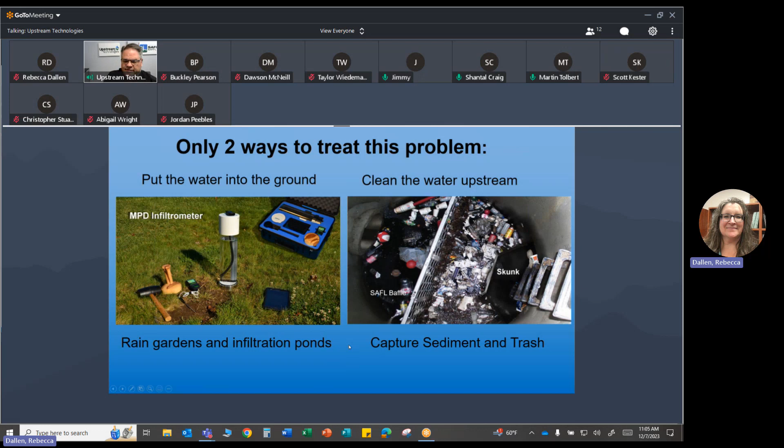So I'll jump in. Please feel free to bring up questions as they come. And if there's anything I'm missing or don't know, I can find that out for you and get back to you. But I'll start with infiltration. Currently, there's lots of ways to do this, but most of them are pretty cumbersome and time consuming. Is this something that you do internally? Is it anything that you do at all? Is it something that you hire out to a geotech? Are there different groups that maybe do this or don't do this in the presentation today?

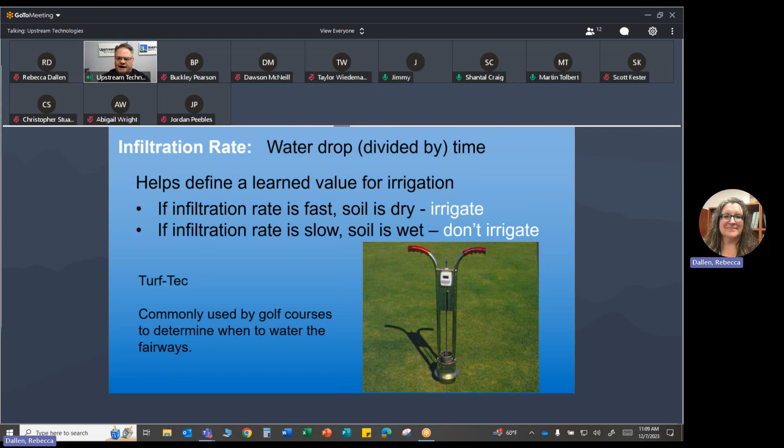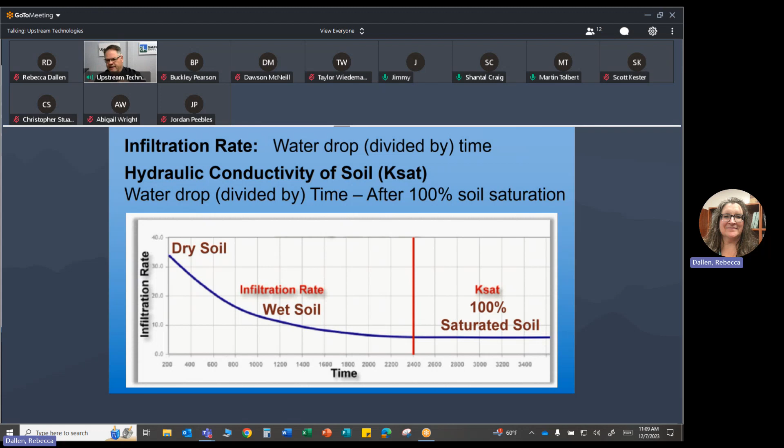There are products out there, like I mentioned, that just measure the infiltration rate. This is a product called the Turf-Tec. They use this in golf courses and stuff a lot, just to see if the ground is infiltrating, if they need to irrigate, if it's wet, if it's dry. But again, going back, that's just somewhere along that falling curve. Eventually it gets where that ground is fully saturated. That's where we want to be.

And so up until now, really cumbersome ways that this was done was drill a borehole or a perc test, fill that hole over and over again until it's fully saturated, and then measure the drop. And how long does it take? And it's very manual, very time consuming.

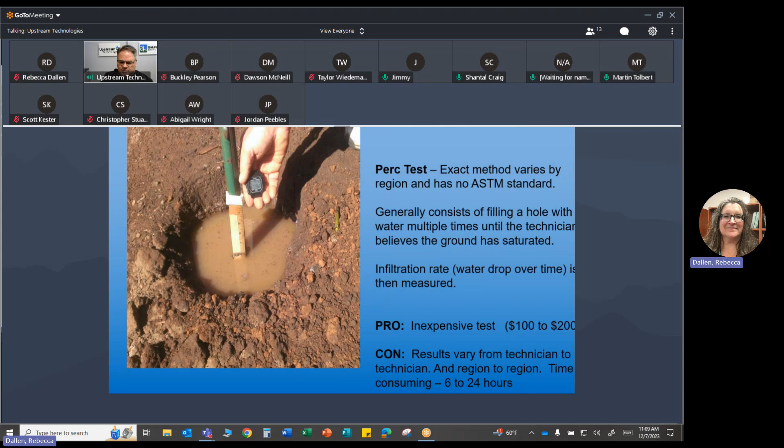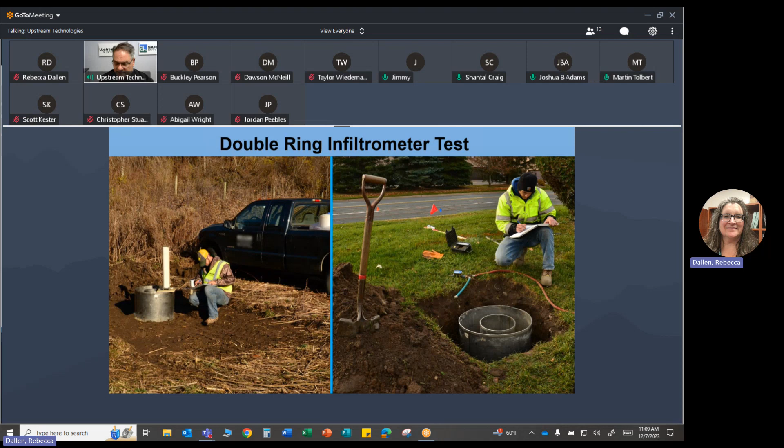Probably the most common and the one that we see the most is the double ring. And as you can see, it's very cumbersome as well. What they do is they bring a tank of water or a big truck, and it takes hundreds of gallons of water, and they saturate that outer ring, and then they keep that center ring at a constant head. So they're constantly pumping water into that. Again, it's very time consuming, usually 4 to 6 to 8 hours to do these tests, and pretty costly if you have to hire this out.

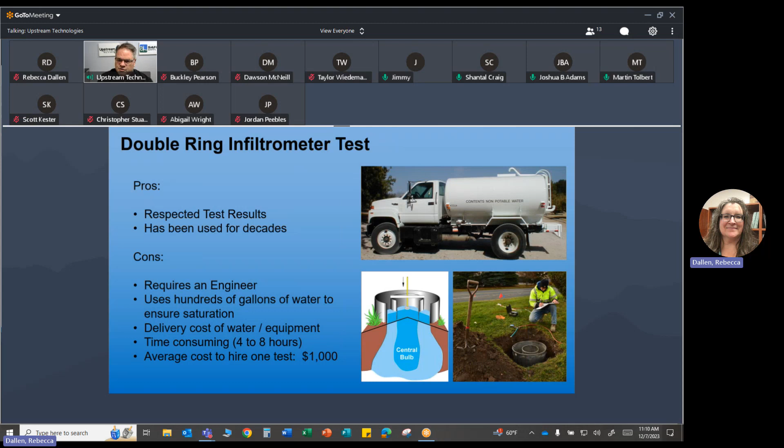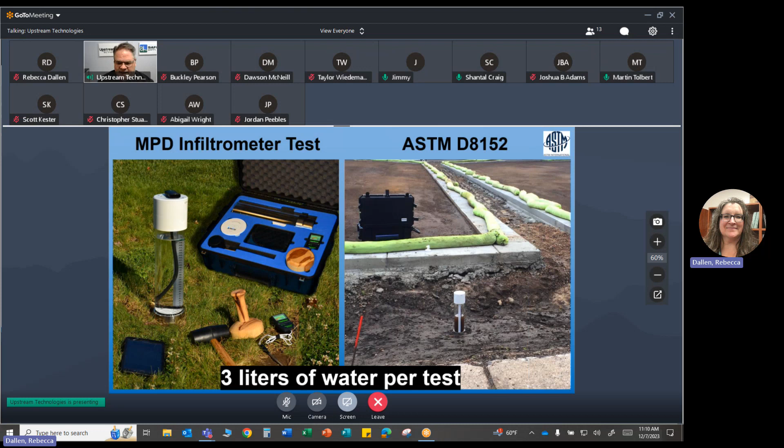So one is the MPD infiltrometer. It's a fully contained kit. Each test just takes 3 liters of water, so less than a gallon of water per test. And so it was established, as I mentioned, at the University of Minnesota after these 2 guys named Philip and Dunne in 1993. They figured out how to calculate KSAT, whether the ground was wet or dry. In 2007, the University of Minnesota modified that test to bring it to the ground surface. And then we started going through research and development, going through the ASTM standard committees and subcommittees.

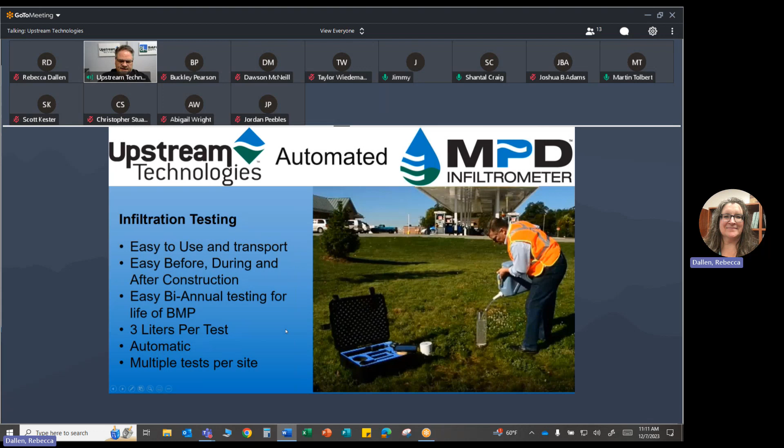And eventually in 2018, this MPD infiltrometer was established as an ASTM standard for calculating KSAT, and then things started taking off for the MPD infiltrometer. So that is a little bit of the history of that. But like I said, now you can go out with a 5-gallon jug. You can perform 5 tests quickly and easily, and it's all automated. And so it's really simplified that process.

I'm going to show a quick video for you. I thought this was already in the presentation, so I apologize. It'll take me just a second to go to our website. Let's see here, MPD. So here is the video. This is about 4 minutes, but it's a really good overview and gives you a really good idea on how the MPD works. So I'll play that and then continue after that.

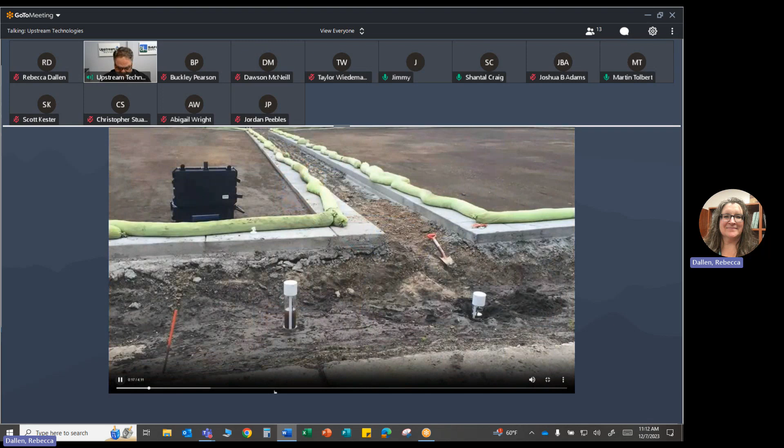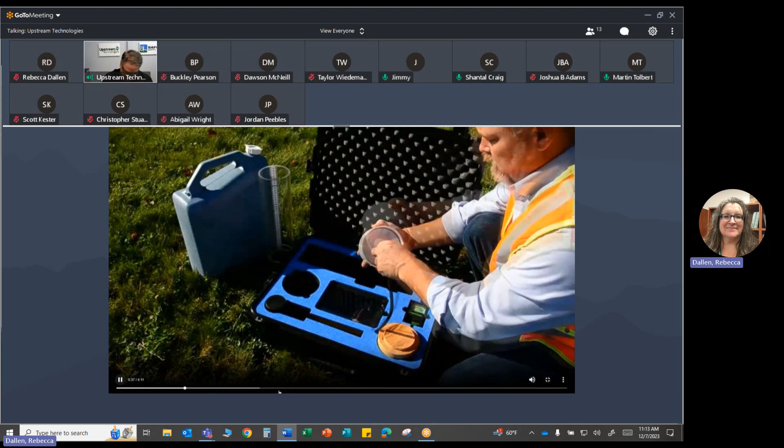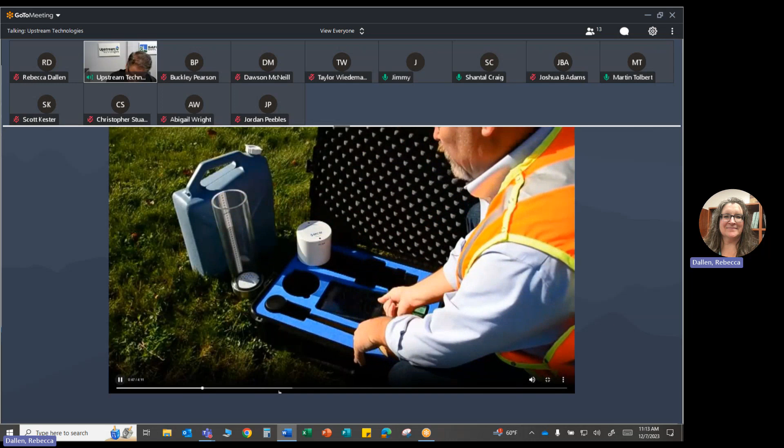Upstream Technologies' automated MPD infiltrometer follows ASTM standard D8152 and will calculate saturated hydraulic conductivity of soil, or KSAT. It is used to design, build, and test rain gardens, infiltration ponds, bioswales, septic systems, and any location where steady-state infiltration testing is required. Lightweight and compact, the MPD can go anywhere and uses less than 1 gallon of water per test. This kit utilizes a graduated cylinder and an automated test head to collect the data. The anti-scour baffle and seal prevents the soil surface from being disrupted when filling the cylinder with water. This automated tablet-controlled system removes any chance for human error.

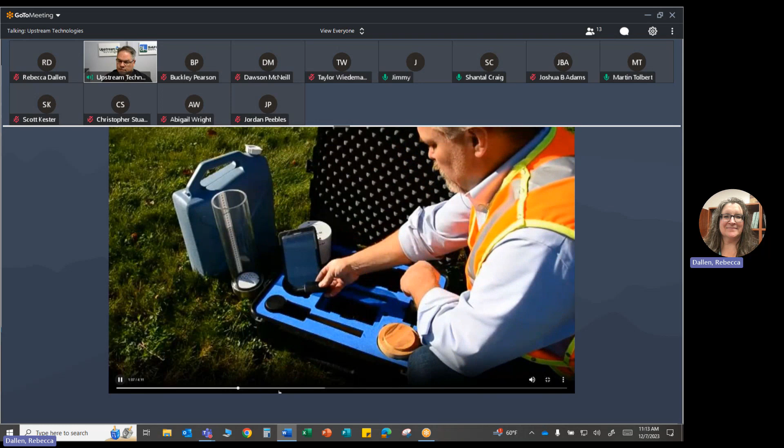Anyone can operate this instrument with little to no training. Simply consult the in-app guide for step-by-step instructions. This system incorporates a Garmin GPS system to automatically report the exact location the test was conducted.

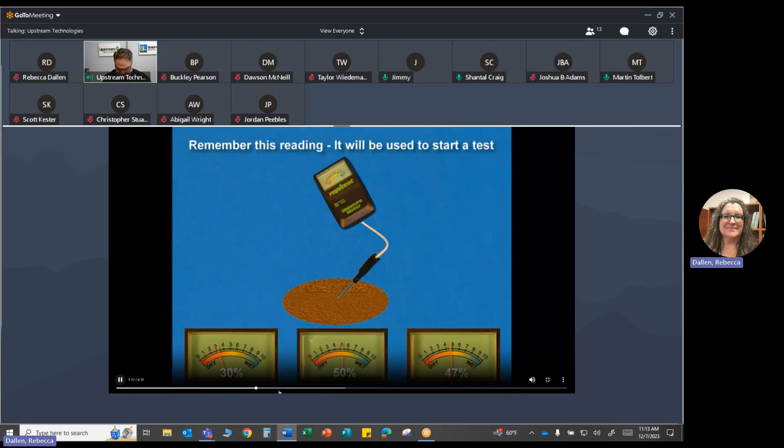When performing a test, the first step is to take an initial moisture reading using the supplied meter. Slowly press the probe into the ground 5 centimeters and wait 15 to 20 seconds for the gauge to settle. This gauge is in 10% increments. The result today is 30% moisture.

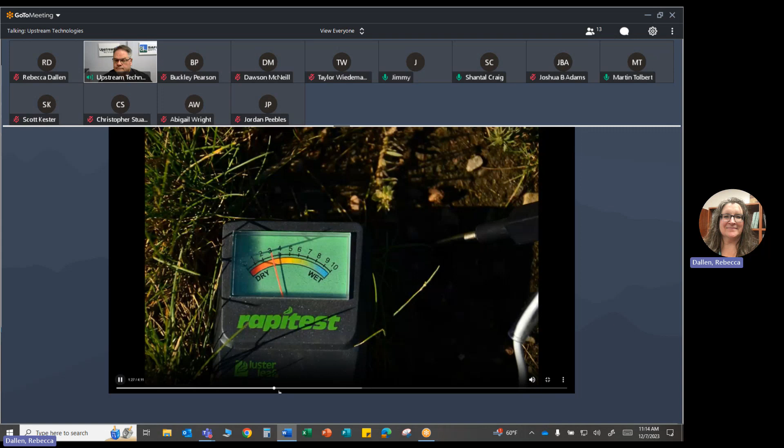Using the wooden set and mallet, tap the cylinder into the ground 5 centimeters. Make sure it is not loose and creates a tight seal with the soil. The anti-scour rubber seal may move during this process. Reach down and reset this seal.

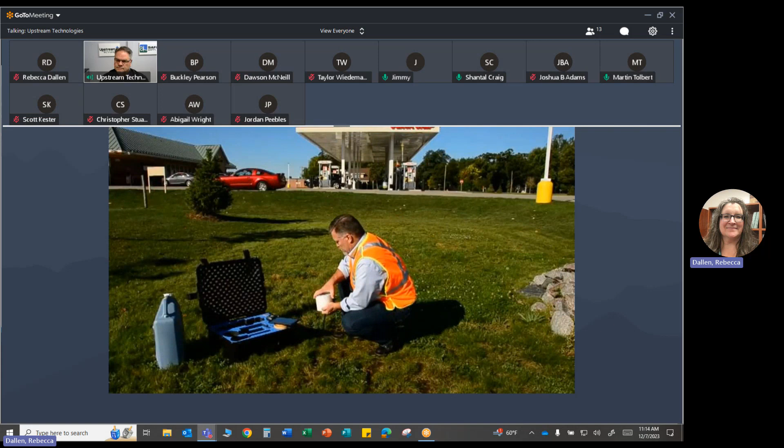Press and hold the button on the top of the MPD head to turn it on, and a green bar will appear in the app. Tap this green bar and a dialog box will appear. Enter the initial moisture reading, in this case 30%, and enter a name to identify this test.

Set the tablet down and fill the cylinder with water. Place the MPD head and hose in and on the cylinder. Pick up the tablet and tap the Submit and Begin Test button. The MPD app will now turn the green bar to orange to indicate the test is running.

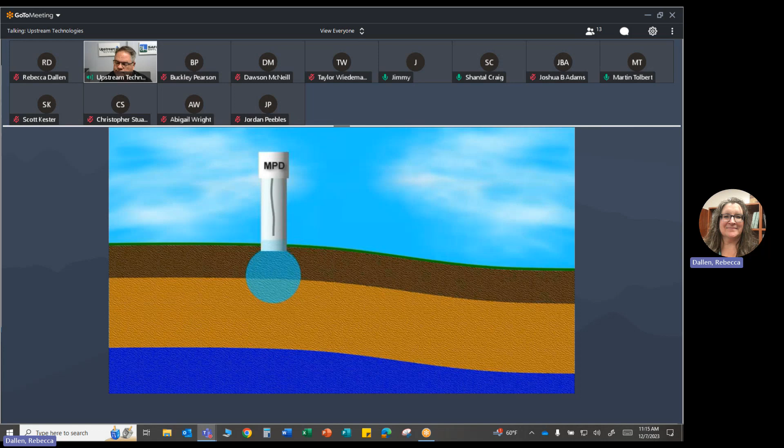The MPD head will measure the water head drop over time and automatically record the data required to calculate hydraulic conductivity. It is best to let the cylinder drain completely before finalizing a test. This will usually take about 45 minutes to an hour, depending on soil conditions.

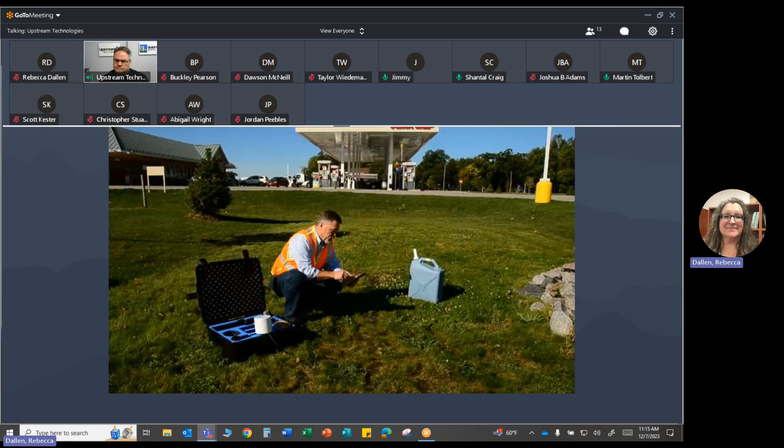When the cylinder has drained, remove the MPD head and cylinder and set them aside. Then take a final moisture reading in the same location as before. In this case, the moisture reading is 80%. To complete the test, tap the orange bar in the app and enter the final moisture value. Then tap the button Finalize Test.

All data will then transfer from the MPD head and will be stored on the tablet. We are now ready to begin another test.

Ground variations change and infiltration will vary around the site. Best practice is performing multiple tests and creating a site average. Ground variations include soil composition and compaction, boulders under the test, tree roots, and even mole and ant tunnels will have an effect.

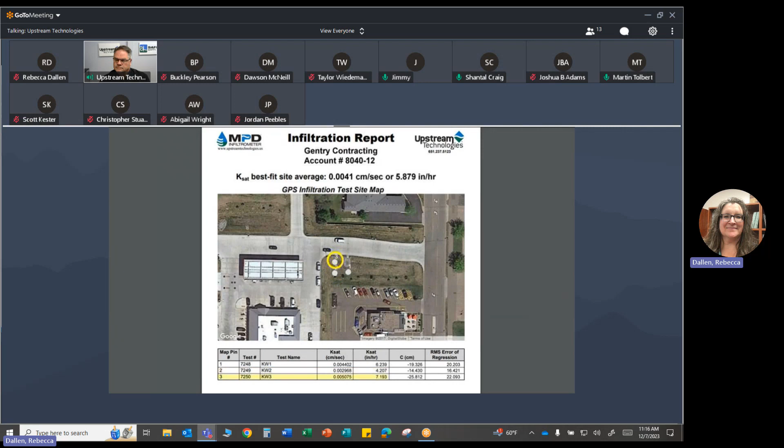When testing is completed, the tests are uploaded to Upstream's cloud server, where the calculations take place. A site report may then be instantly downloaded. This report contains a description of the site, a best fit site average, a satellite photo of the site with a GPS map pin for each test performed, and the hydraulic conductivity for each individual test.

To maximize time in the field, Upstream Technologies offers a triple MPD kit, so 3 tests may be run simultaneously by one person.

So that is a quick overview of the MPD infiltrometer and how it works.

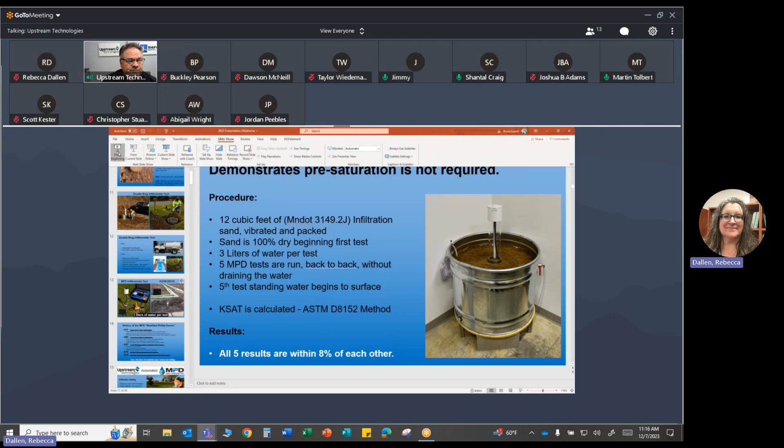So lots of testing. I talked about the ASTM standard and the committees and subcommittees. This was an internal tank that was used to look at this infiltration. Started with a completely dry tank, kept doing tests until there was standing water, so fully saturated, to show that you can calculate KSAT whether the ground is wet or dry.

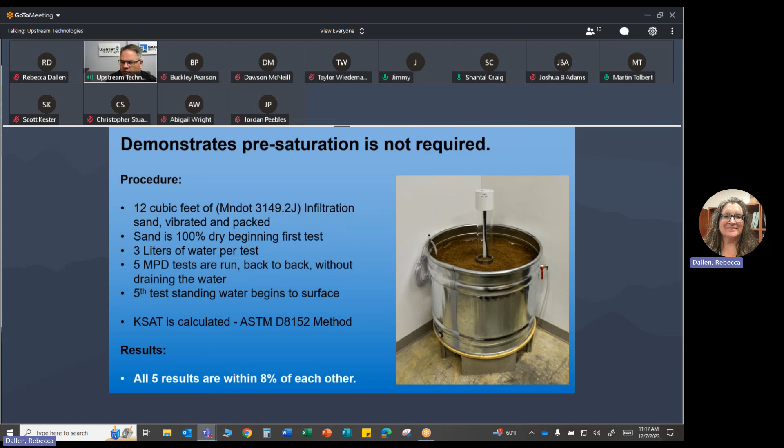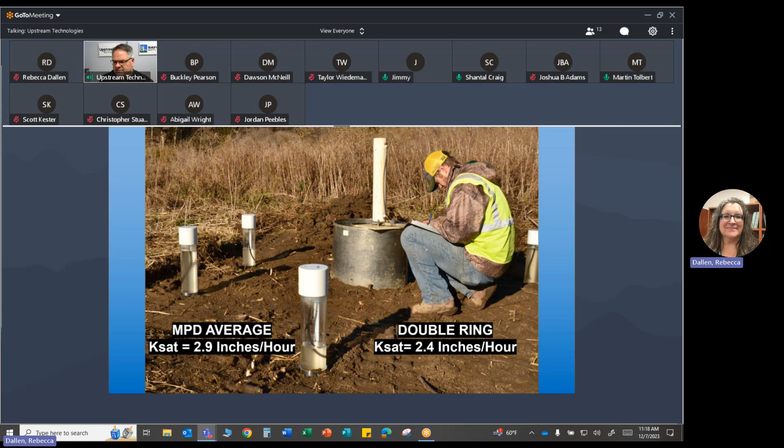So definitely lots of time saving, lots of water saving, as well as a lot less costly.

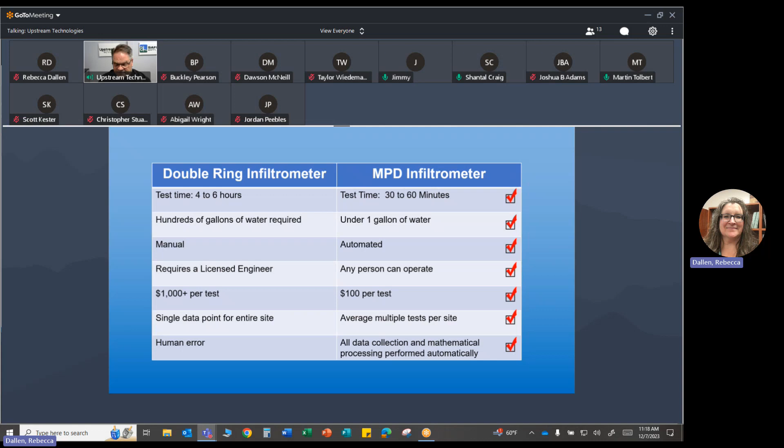Again, the ASTM standard was established in 2018. And so now you can do these tests quickly and easily and for a lot less outlay of cash, so a lot cheaper. As it talked about in the video, you can do multiple tests at the same time.

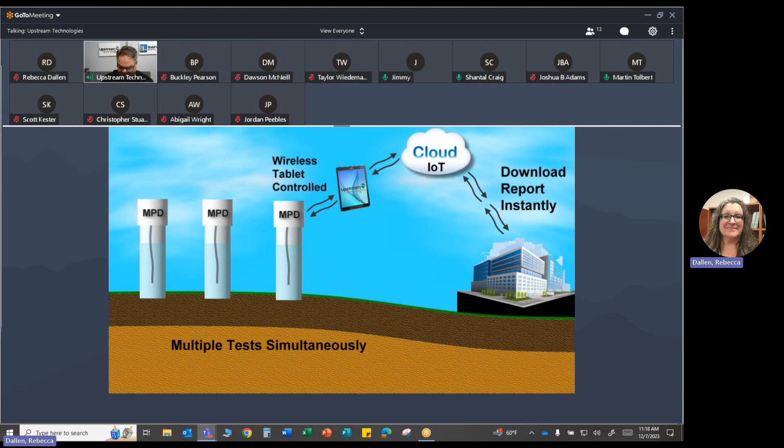Once those tests are complete, it'll go to the tablet that's included, and you can then it uploads to our server once it's connected to the internet, and then you can immediately download that report. So it talked about this a little bit in the video, but it's pretty cool.

You can download this instantly. It gives you a satellite photo, gives you the GPS pinpoints of all the tests that you took, as well as the Ksat for each of those test points, and then an average for the whole site.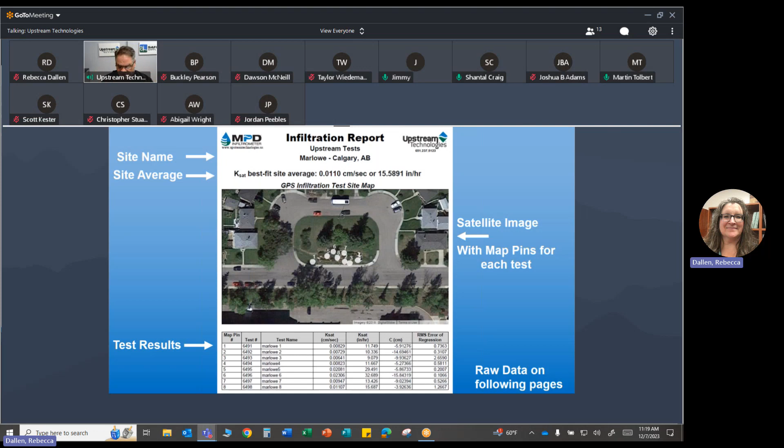Being utilized quite a bit across the country, up into Canada. We're even seeing activity in the Scandinavian countries, Sweden and Norway.

Here in North America, we crossed over 7,000 tests, so it's continually growing. Looking at Oklahoma, we're kind of surrounding you guys at this point, but no tests are being done there. That kind of brought up the question, originally when I was asking if you guys do this kind of testing, I wanted to see if that's anything you see a use for. Is it something you just don't see these tests for, or require them for sizing retention ponds and things like that? Does anyone have a thought on that at all?

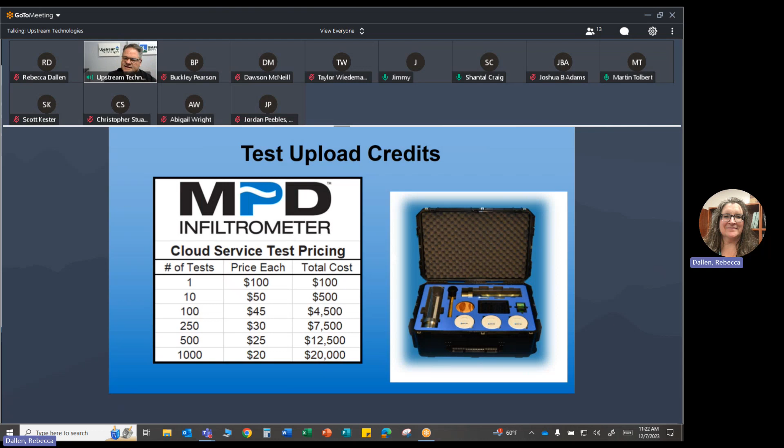So as you can see, rather than spending $800 to $1,000 for a single test point, you can do a whole test for quite a bit less. All the pieces and parts are under full warranty, so if anything happens to it, if something stops working, we'll fix it or replace it at no cost.

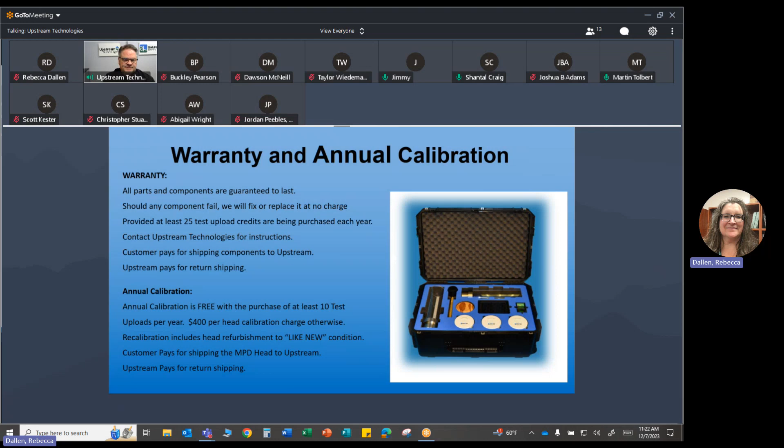The other thing we're starting to see is because it's digital, cities and municipalities are using this as a way to really track those retention ponds and figure out what the maintenance triggers are, what the levels of infiltration are, because you can go out and do these tests so quickly and easily. And because it's digital, they're looking at ways to tie it into their asset management software, their GIS software, things like that. So that's a quick overview of the MPD infiltrometer.

If anyone would like more information, we have a group that focuses just on the MPD, so I can put you in touch with them and they can give you more detailed information if there are questions. But is there anything right now, any questions, before I move on to the SAFL baffle? No?

Yeah, those are some things that we've looked into. As of right now, they're just being sold as a kit, but we do have groups that have those and can source those out. As far as Oklahoma, I don't believe we have any there yet, so that's something we can keep talking about.

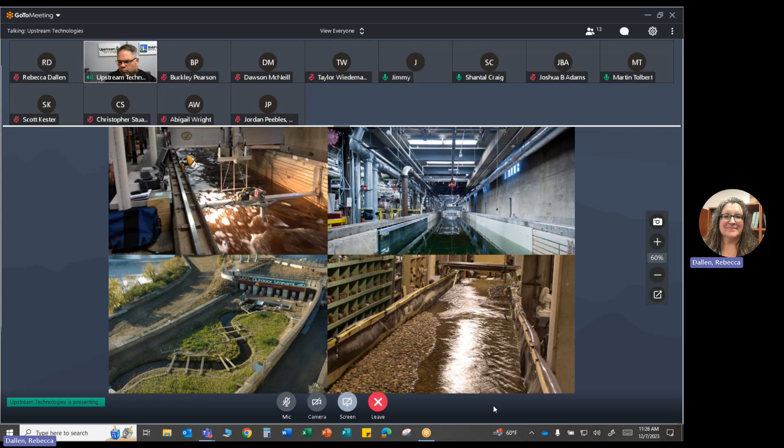People come from all over the country to do testing here. Back in 2007, our Department of Transportation went to St. Anthony Falls and said, we're having a problem. We put in all these sump structures across the state, and they're capturing only about 30-35% of the sediment, because what's happening is it captures the sediment, and then if a big storm comes through, it washes all that sediment out and sends it downstream. So they asked St. Anthony Falls, can you figure out a way to stop that from happening? And so they embarked on a 4-year research and development effort to try to solve this problem.

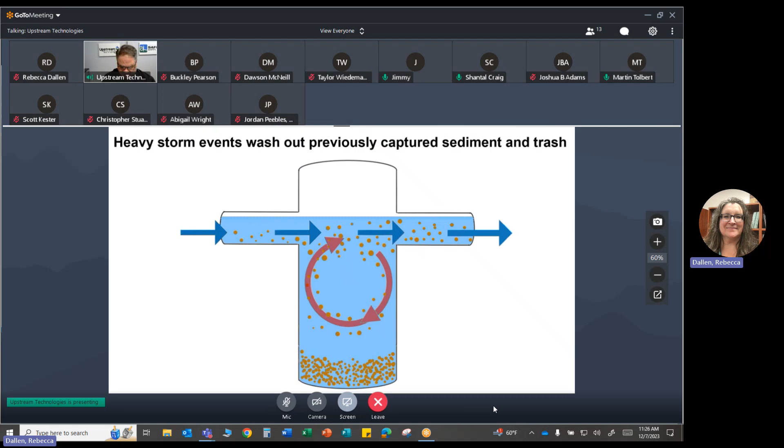After 4 years, they created the SAFL baffle. It's a very simple solution, but it took them a while to figure out all the details. It simply goes in a standard sump structure and eliminates all that washout. So now you can take a standard sump, put a SAFL baffle in there, and get up to over 80% TSS removal simply by putting a SAFL baffle in there.

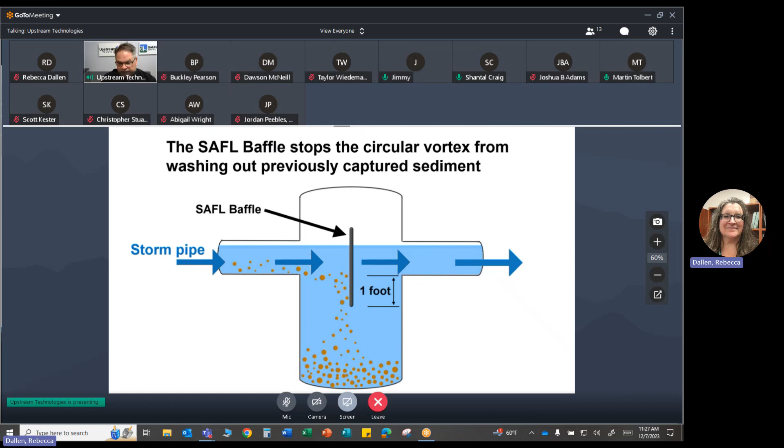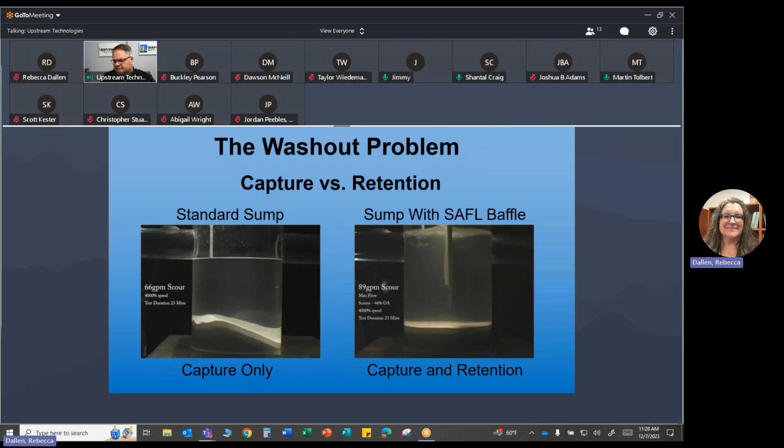So now you can get the same kind of capture rates as a hydrodynamic separator, but at about 1/5 of the cost. So quite a bit less expensive.

They started out very heavy in Minnesota. Now we're in about 27 states. We have probably 150 to 200 of these that go in the state of Minnesota every single year. But as I mentioned, it's expanding out. We're starting to see some activity in Texas and, again, kind of surrounding Oklahoma. But it's something that if you guys run into situations where you need to get sediment out of the storm drains, this is a very cost-effective way to do that. And we're gaining popularity every day. So we've been excited to see the expansion. Again, we started out primarily in Minnesota, and now we're out into 27 different states.

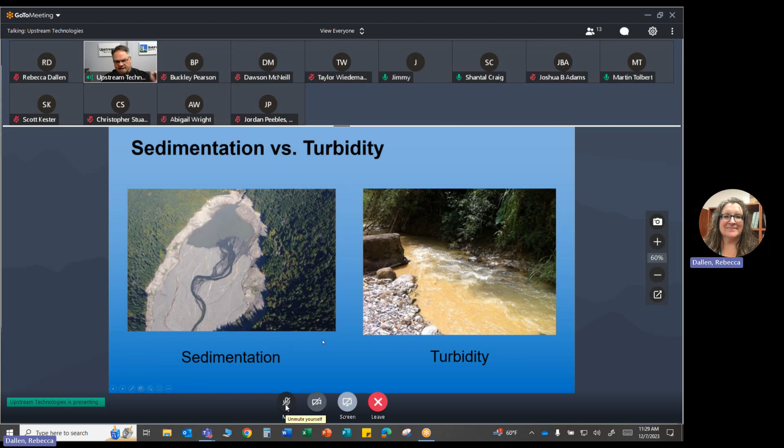It's focused on the sediment side, so it definitely falls in the hydrodynamic separator category. Turbidity is more of the real fine stuff, and we run into that a lot in Georgia because they have real fine clays. So we focus on the sediment, which is 70 microns and above. Anything smaller than that would require some sort of filter or membrane type system, because the hydrodynamic separators only handle 70 microns and above as well. And when you look at those, they're typically $20,000 to $30,000 to $40,000. The average SAFL baffle is about $4,500. So quite a bit less expensive.

The other thing that we're seeing, and again, this is just ideas to keep in mind, if you do need to capture the real fine particle sizes and deal with turbidity, we've been seeing a lot of pre-treatment with the SAFL baffle. So the SAFL baffle can be used as primary treatment and achieve those 80+% TSS removal numbers. But if you have some sort of filter system, a pond, or an underground chamber, the SAFL baffle can be utilized as a pre-treatment device, part of a treatment train. That's very common. We're seeing that a lot.

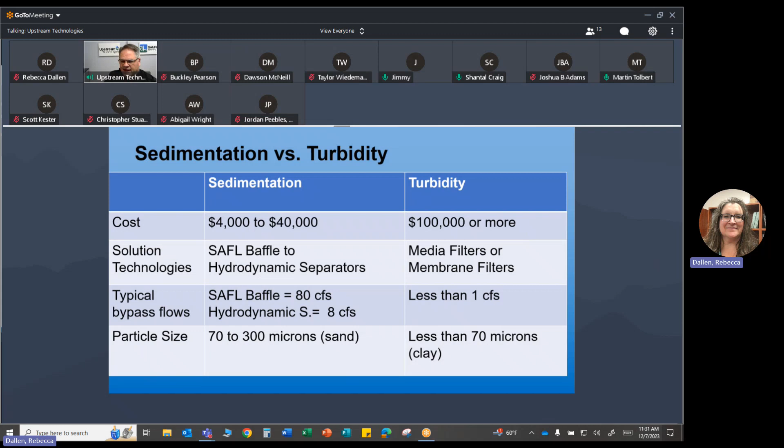Again, about 90 to 95% of the sediment is 70 microns and above, so that's where our focus is, and we really help with the TSS removal goals. That 80% seems to be very common, and we're achieving those all the time, 80+% TSS removal. It's also helping with reduction of dredging costs because now we're vacuuming that upstream, and also phosphorus removal. St. Anthony Falls is doing a lot of work with phosphorus removal testing. It's years in the making, and they're looking at phosphorus - is it all in the water, or is it clinging to the sediment? There was a test done in Florida where they showed about 50% of the phosphorus is clinging to the sediment. So if we can get the sediment out of there, we're really helping with that as well.

TSS, again, has two parts: there's the capture piece, but also the retention. By adding a SAFL baffle to a sump structure, you not only get the capture, but you retain it and achieve those high TSS numbers.

It's built out of stainless steel, so built for longevity, and there's no maintenance to it—no moving parts or maintenance. It's a very simple solution. Once it's installed, the only maintenance is vacuuming out those sump structures.

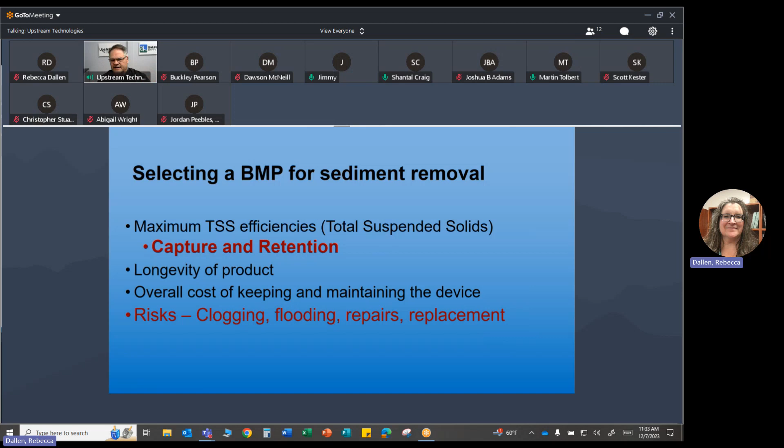The other thing that was a big concern for the DOT, now that we're putting something into these sump structures, is they wanted to make sure it wasn't going to clog or back up systems. So there was lots of testing and research into making sure it's not going to clog, and if for some reason something did clog it, it's not going to back up the systems. So lots of testing with that.

If you haven't seen the SAFL baffle, this is what it looks like. Again, it's built so that it could be retrofit without having to tear up the streets. It can be new construction, but it comes in panels and parts so that everything fits through the manhole and can be retrofit as well. So it's being utilized quite a bit in both of those scenarios.

A lot of times it's new construction, other times it's being retrofit into existing structures, and the cities or municipalities don't need to tear up the streets—they can just put these in.

The testing they did, that 4-year process, included lots of testing, case studies, and real-life performance results. But the other thing that was done during those 4 years was they worked with Barr Engineering and created a software called SHSAM—sizing hydrodynamic separators and manholes.

One of the things we're offering is if you have any projects with sediment capture needs, we'll do this free analysis for you and show you what the TSS removal numbers would be, the costs, and the sizing for your project specifically at that location. We can also help determine if you need multiple structures and what's needed to achieve that 80+% TSS removal number. If that's something you guys need, we can do that analysis for you.

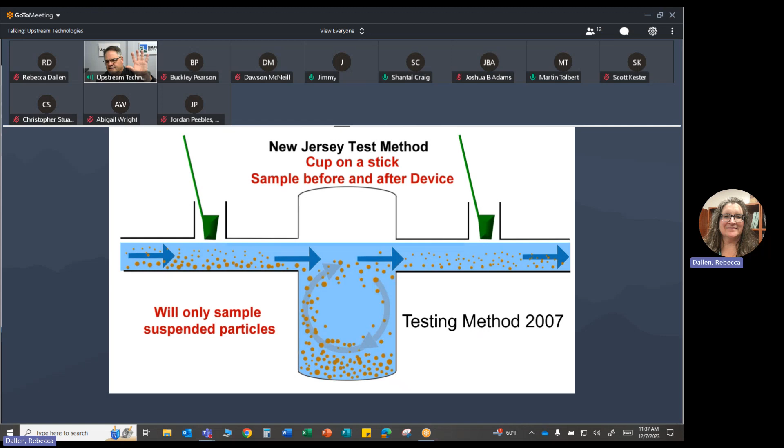So this is what's been put into that software, so now you can compare these BMPs head to head. The cool thing is the University of Minnesota created this new test method, and it became an ASTM standard for testing. Now the New Jersey cup method has kind of been pushed aside, and the New Jersey test method now is this mass balance method.

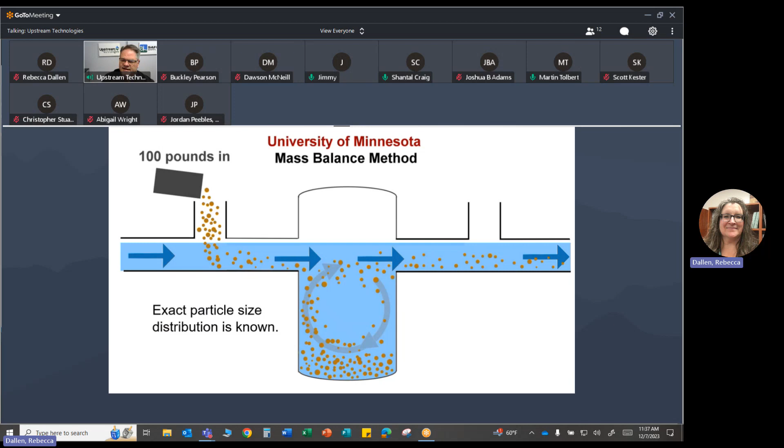The SAFL baffle has been tested by New Jersey, or the NJCAT and NJDEP, and it's been fully tested, verified, and certified by NJCAT. So that's something that has been happening.

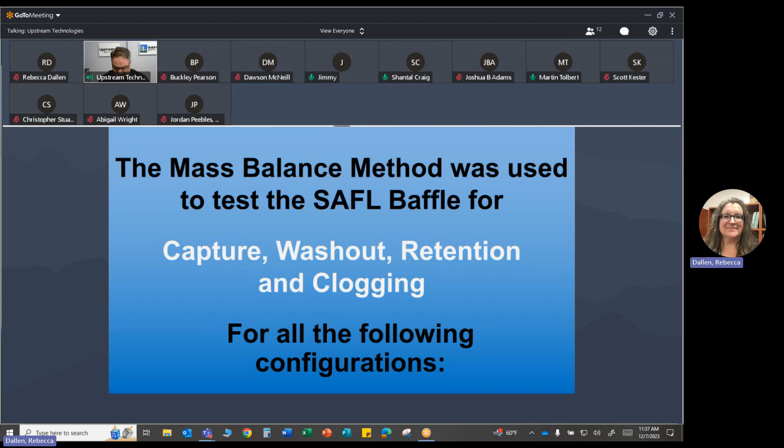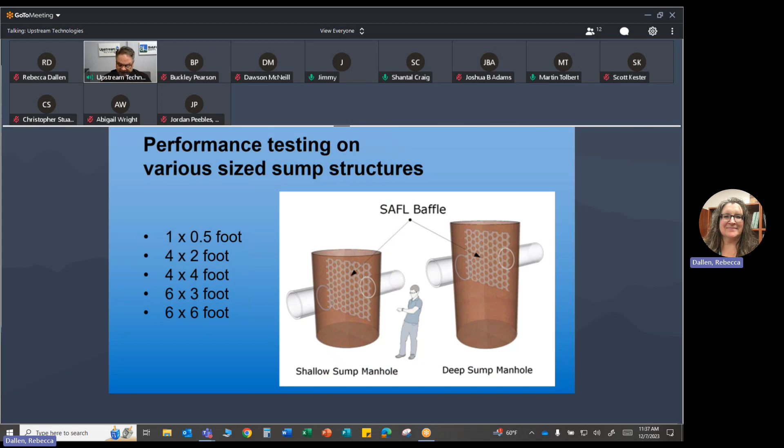They did lots of testing with the SAFL baffle to solve this problem, looking at different things like low flow rates, high flow rates, and different sump sizes. One thing they found with the sumps is that the deeper the sump, the more capture, which seems to make sense up to a certain point.

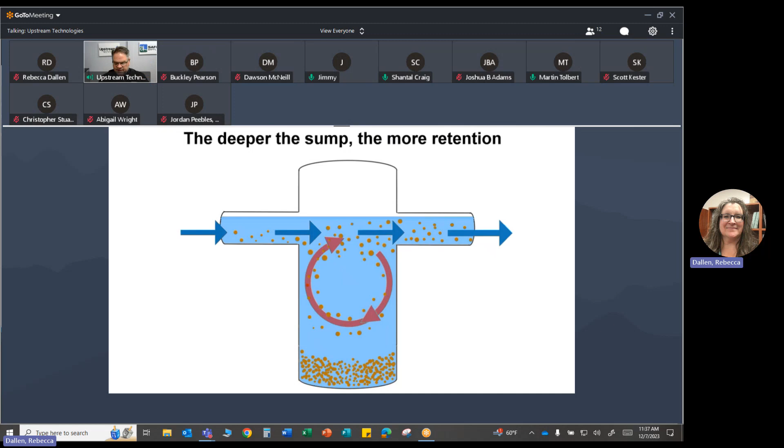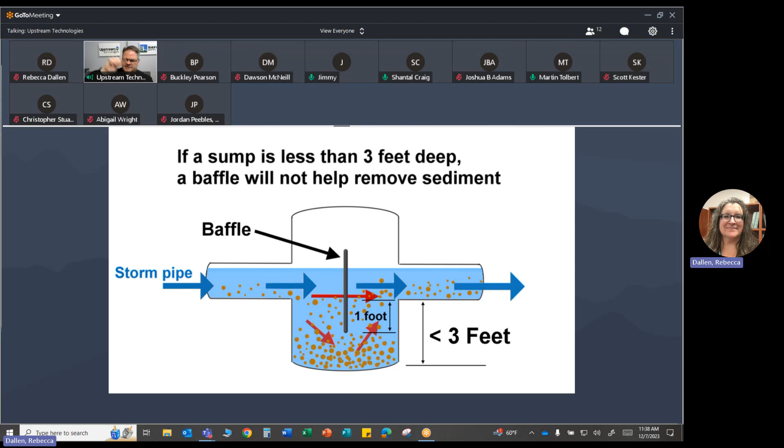But going the other way, they found that if the sump is under 3 feet, even with a SAFL baffle in there, they're getting some washout. So we have a minimum of a 3-foot sump for both the SAFL baffle and the SNOUT. They both sit a foot below the outlet pipe, which allows 2 feet at a minimum of capture space and eliminates all that washout.

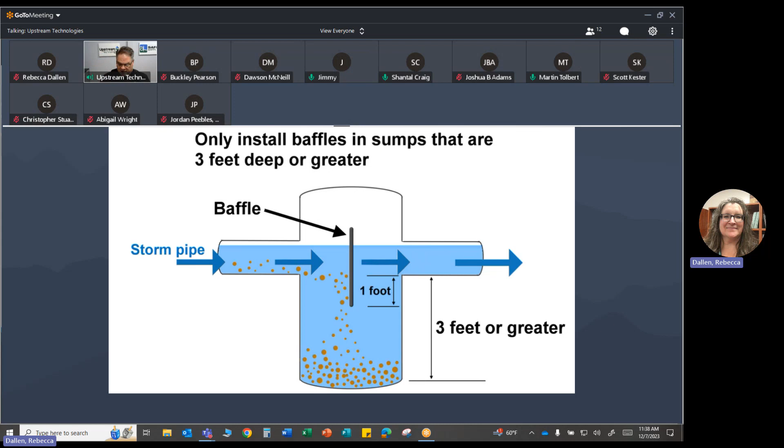They also looked at the placement of the baffle, and if they got too close to the inlet pipe, they were getting washout. So we focus more towards the center of the structure and make sure there's enough room for a vac truck to get down the middle if the manhole is in the middle. We've also seen 2 manholes put in on the side if it's new construction, so the vac truck can go on either side.

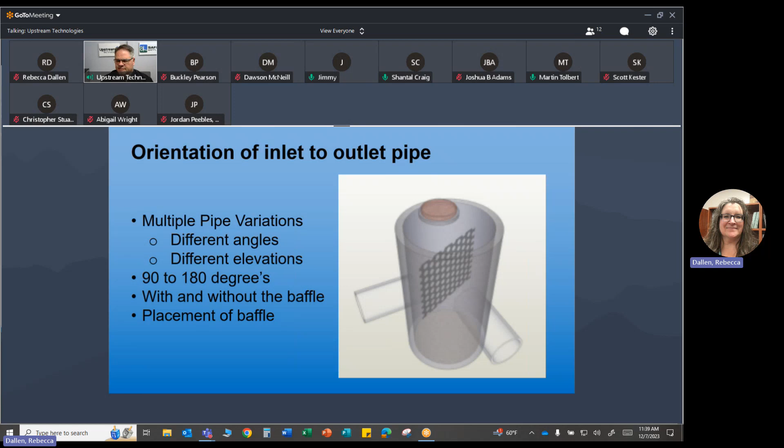They also looked at different angles because, as you know, the pipes aren't all 180 degrees apart from each other. So depending on how the angles come in, that depends on how the SAFL baffle will fit. We can do CAD drawings for that as well and show you how the SAFL baffle would fit and how it needs to be installed for your specific project.

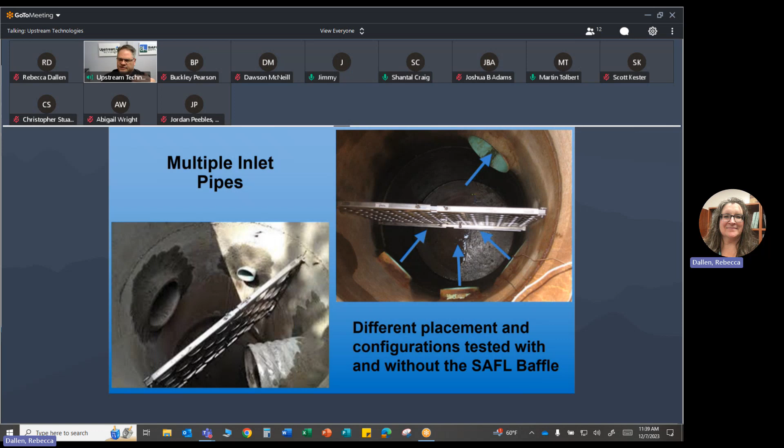It also works with multiple inlet pipes. So if there's multiple inlet pipes, we can help with that and do the CAD drawings for that as well.

But there is one type of sump it doesn't work very well with, so something to be aware of. If all the water is coming from the top, like a catch basin at the end of a parking lot or something like that, we need at least 75% of the flow to be horizontal. So we can have some water coming from the top, but if all the water is coming from the top, we'd want to be downstream from that so we can have that horizontal flow.

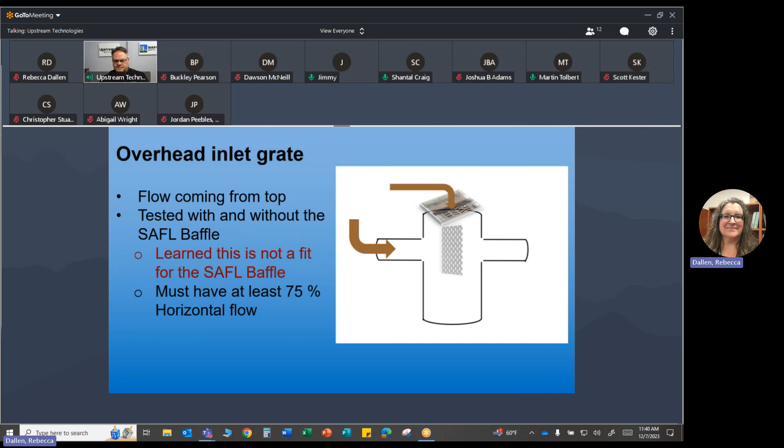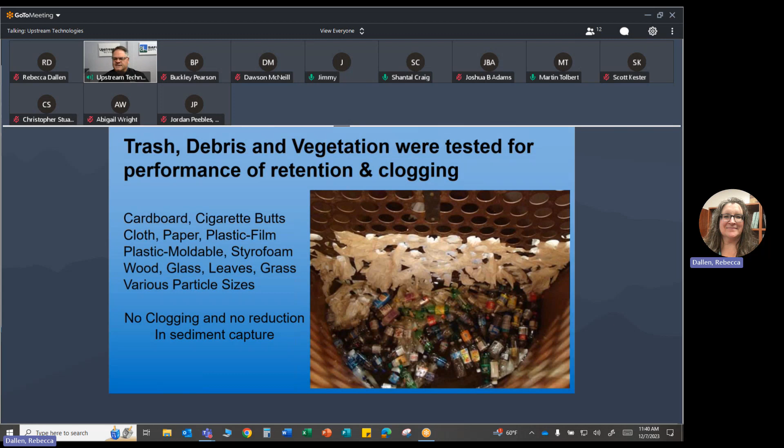I talked about the garbage. This is some testing they did—they actually clogged it and made sure that even if it's clogged, it's not going to back up the system. And we have over 2,200 of these now around the country, and none of them have caused a backup.

This one is in our capital city of St. Paul, Minnesota, and as you can see, a lot of garbage is coming through that. Typically these sump structures are required to be cleaned out about every 6 months or so, that's about the typical time frame. This one is cleaned out a little bit more frequently—the maintenance crew keeps an eye on it because of all the garbage coming through. But typically it's about every 6 months or so for a clean out.

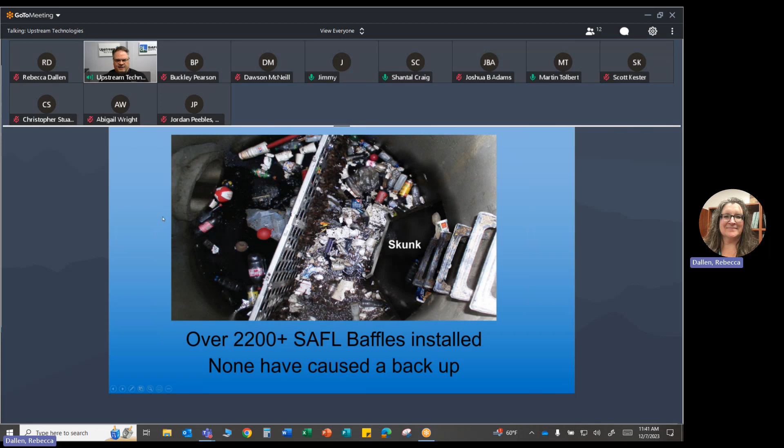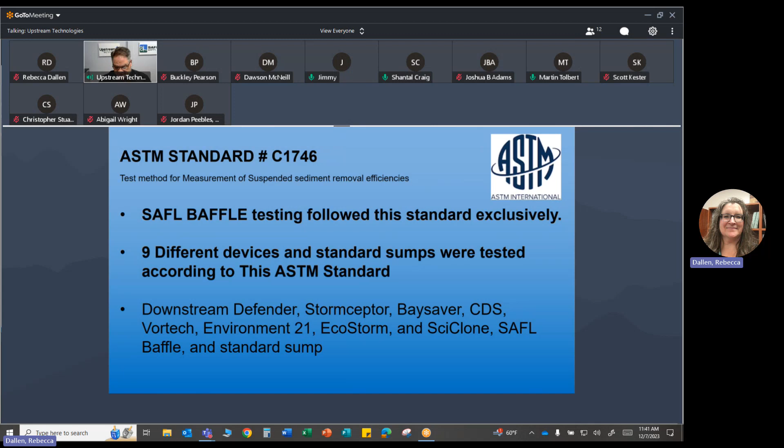The SHSAM software, real quick—these are the 9 products that were tested, so you can compare these products head to head. This is the third-party software we'll use to do a free analysis for you if you have any projects. We'll look at the acreage of the project, the impervious area, the slopes, pipe diameters, and all that, and then give you the exact TSS removal numbers for that project using the SAFL Baffle.

This is one we did in Madison, Wisconsin. They had to hit 80% TSS removal for this permit. So with the software, they looked at what if we just put a 4-foot sump in there—it came in about 32%. They put a SAFL Baffle with the 4-foot sump, and it bumped all the way up to 71%, but they needed to be at 80%.

So they said, well, we could put a second structure in there, or what if we just make this structure a little bit bigger, make it a 6-foot sump. They were able to hit 80% with a 6-foot sump and a SAFL Baffle. They also tested the Stormceptor, the Downstream Defender, and the CDS unit, and those also hit 80%. In fact, they were a little higher than us, but they were also 3, 4, or 5 times the cost. So as you can see, even with one structure, there's lots of money to be saved with a SAFL Baffle and sump structure. But if there are multiple structures, this can really add up and save the municipality, city, or client—if it's a developer or something like that—a ton of money on that project.

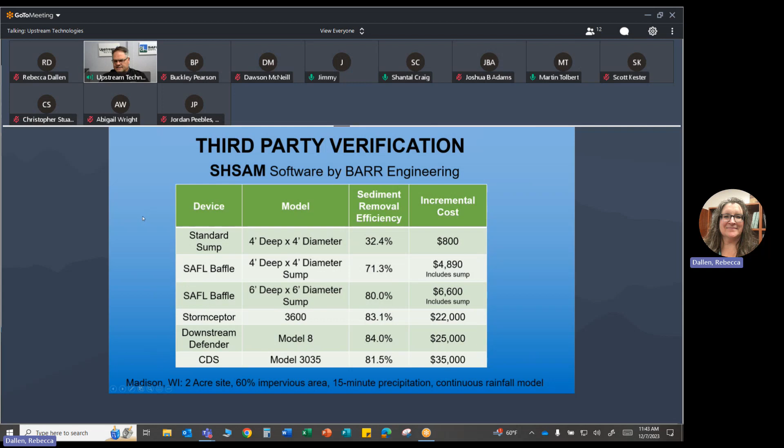Again, made in the USA, 100% stainless steel. And one of the things that we did in 2019 is, we always said it'll be a 20+ year lasting product. So you can put it into the sump structure and just, twice a year, vacuum it out and you'll be good to go.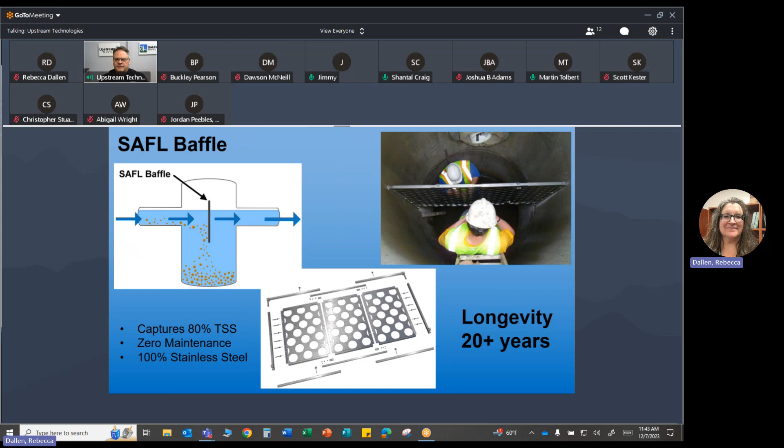But in 2019, we actually put together a 20-year guarantee. And so the SAFL Baffle is guaranteed for 20 years. If anything happens to it, we'll fix it or replace it at no cost. And so every SAFL Baffle comes with a month and a year stamp on it, and it's under full warranty for 20 years from that date.

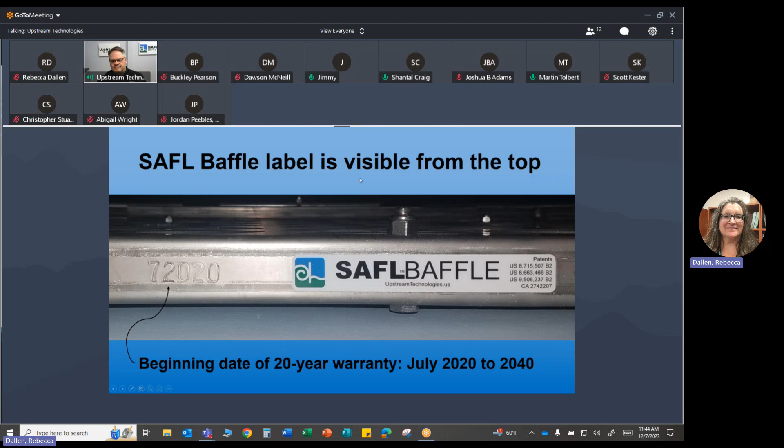The DOT here in Minnesota put out a report in 2017, and they said that the SAFL Baffle is saving the state quite a bit of money. And over the next 10 years, they said it'll save the state over $26 million. Those savings come from all sorts of different things, including the reduced need to dredge. So they're not going to have to dredge as often, but also they can save money on the projects themselves by not having to put in the much more expensive hydrodynamic separators.

And then they're able to also retrofit these into existing sump structures, so they didn't have to do all the street tear up and reconstruction. So lots of money was saved by using the SAFL Baffle. We were pretty excited for them to call that out.

I mentioned pre-treatment before a filter system. Here's an example of a forebay replacement. So a lot of times in these ponds, there's a forebay they put before to capture the sediment and the garbage before it goes into the retention pond.

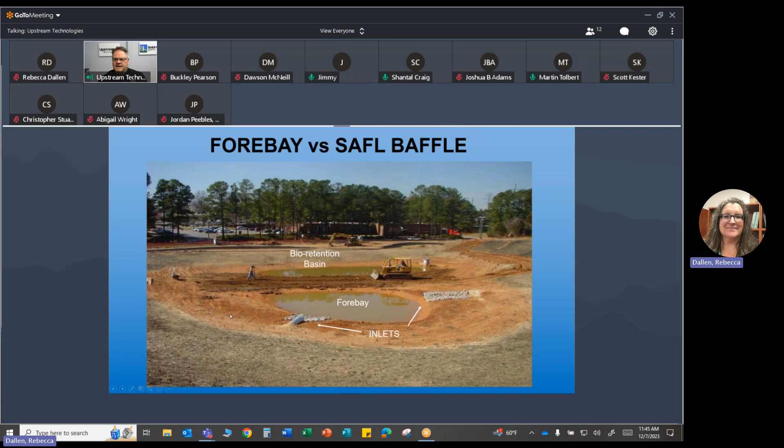But what we're seeing is, especially if there's space restraints, rather than doing a forebay, putting a sump structure in there with a SAFL Baffle if there's sediment issues, and then if there's garbage, put a SNOUT in there as well, and do a pre-treatment before the retention pond without a need to have a forebay where the garbage is floating in there, or they have to dredge out that forebay.

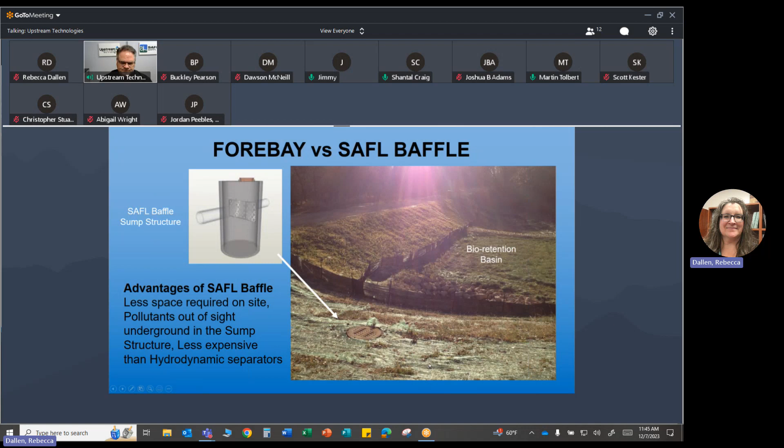We're also seeing it a lot in front of these underground chambers. So this was one that we did in Minneapolis at the 3M parking lot. They put in a big underground chamber. And so what they did was they did 3 sump structures before the underground chamber with Saffle Baffles in those to stop the sediment before it went underground. So we're seeing that quite a bit as well.

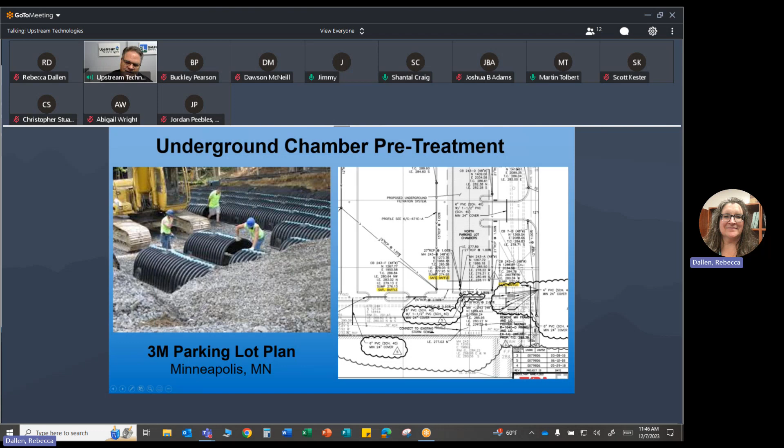Some retrofit things that we've seen, just again, this is more just to be aware of. If you run into certain situations where you're thinking, oh, if we had a retrofit product or something we could do without having to tear up the streets, that would be great.

And so we retrofit a SAFL Baffle across that 10-foot structure. We added additional bracing because the flow rates were so high. But here we are 3+ years later, and it's still working great. It's handling the high flows, but also handling those rocks coming through there.

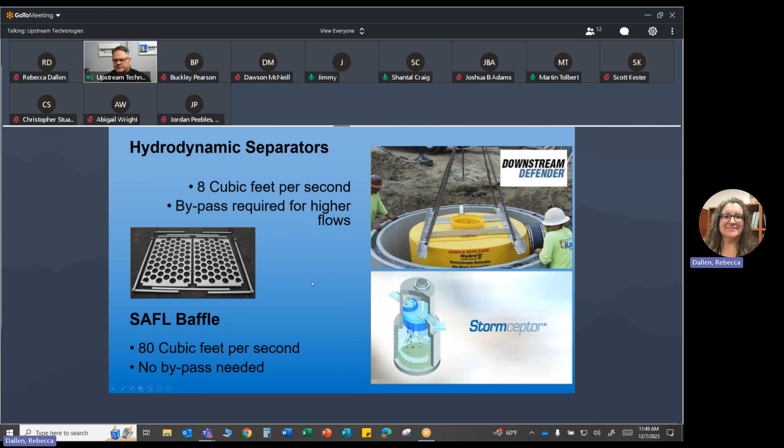And then the following summer, they had a new construction project, and they just did standard sump structures with SAFL Baffles in them and saved a ton of money doing that. So it can handle the really high flow rates, and there's no bypass required.

And so we were seeing a big confusion in the market that all these baffles were the same. And so we'd see projects with this product listed and then a picture of the SAFL Baffle, or vice versa. It'd say SAFL Baffle and then it'd be a picture of this. So just want you to be aware of that. Not all baffles are created equal.

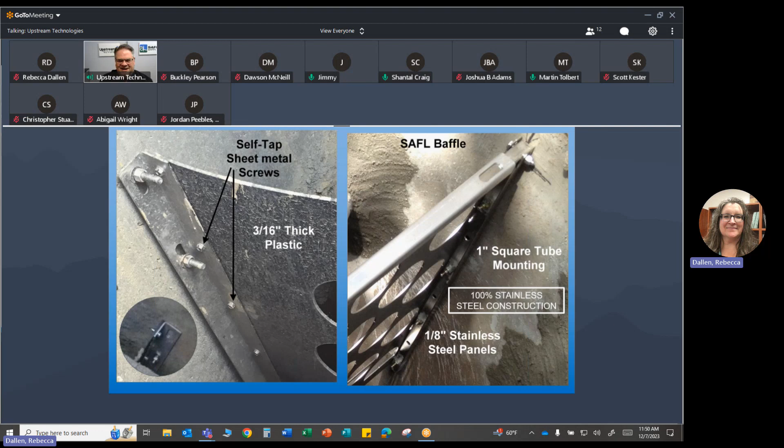This one, actually, the problem started happening. If any pipes were sticking out at all, these were getting installed right up against the pipe. And you can only imagine the backup and the clogging and the issues that this started to cause. So I don't know if you'll see it in Oklahoma, because a lot of cities are calling and saying, hey, these are clogging. We had maintenance crews that had to cut these out, and so now there's nothing in there. Can we put a SAFL Baffle in there?

The worst one was, there's a piece over the inlet pipe and then a piece over the outlet pipe. We had one city where the outlet piece got pushed up against the outlet and flooded the whole street. It was like 2.5 feet of water, flooded basements, cars that were flooded. So big issues with these for clogging, and that's one of the nice things about the SAFL Baffle. The way it's situated in the middle of the structure, it's not causing backups or clogging like that.

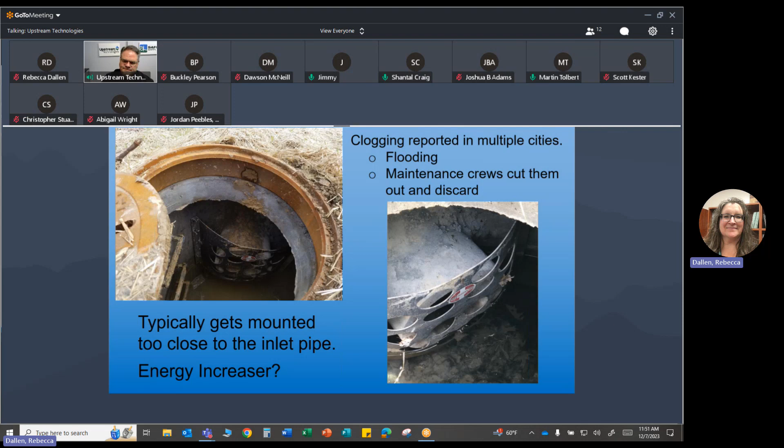The other thing that we've seen is contractors just say, it's just a piece of metal with holes in it, so I'm just going to take a piece of metal and cut holes in it. Something for you to be aware of, because the problem with this was the contractor charged them for a SAFL Baffle, and then they just built one. And this was only 25% open space. And it was actually causing more turbulence than if it wasn't even in there.

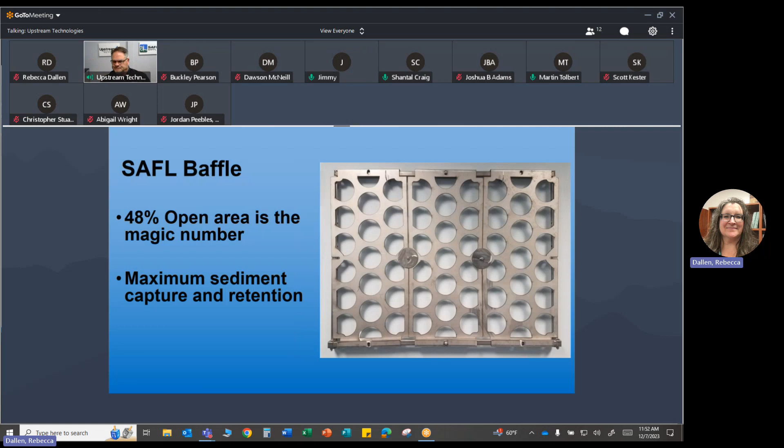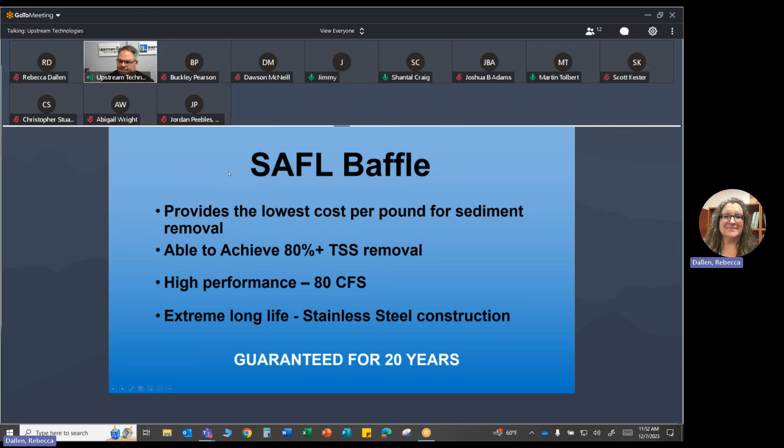So that 4 years of research really did create the SAFL Baffle to be something unique, something that really works and is effective. And it was this magic number of 48% open space that created that flow through there and eliminated all that washout. So that is a long-winded explanation of the SAFL Baffle. It was created to stop that sediment so we can achieve those high TSS numbers. We can handle really high flow rates, and it's built for long life and guaranteed for 20 years. So that is the SAFL Baffle.

I just have a few more slides on the SNOUT, but before I jump into those, does anyone have any questions or thoughts on the SAFL Baffle at all?

Yeah, well, so typically they go in a standard sump structure, but that structure could be round, it could be square. If it's a cement structure, it just gets drilled into the cement structure, and it's very easy to install and can be retrofit. If that structure is plastic or a different material where we need to secure it, then that's more of a new construction type structure.

And so it would be kind of project by project, but that's something that we can help you with and do that analysis for you, number one, but also help you with the structures and make sure that those are the right types of structures, especially if it's a new construction type project. Yep.

I don't see any other questions on the chat. Let's see here. Anybody else? You're making it easy for me. Sorry I talked so long there.

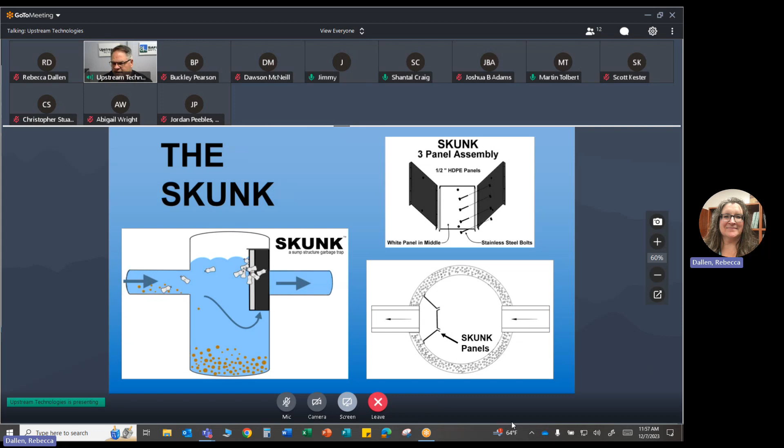Okay, so we had a Top Golf and they put in a Garbage Guard, and it was all black. The middle piece is a little bit different, and after figuring it out, the contractor said his only issue was it was hard to know which piece went where. You should make that middle piece a different color. So we changed it from black to white. And once we put it together, we thought we should call it the skunk instead. So we changed the name to the skunk.

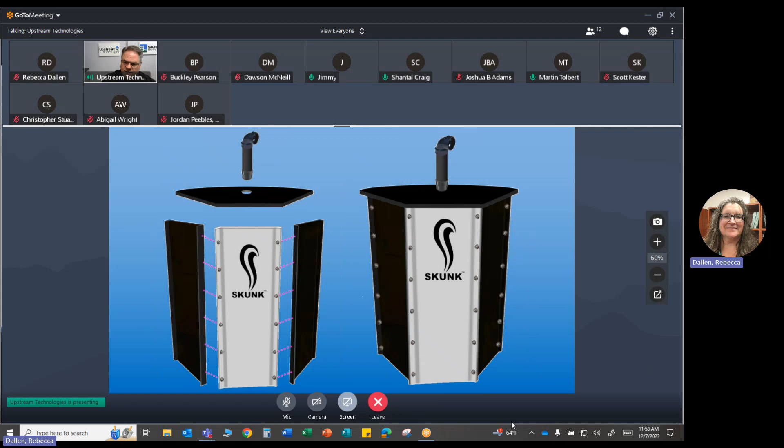Here is what it looks like. It comes in four different sizes, depending on the outlet pipe, but it's built in panels that all fit through the manhole. So it can be new construction or retrofit as well, just like the SAFL baffle. So that's the skunk, also made in the USA. That is what we are doing here at Upstream. We have the MPD infiltrometer for the geotech side, and more on the civil side, we have the SAFL baffle for sediment capture and the skunk for floating debris.

Any parting questions or thoughts at all? All right, thanks, Jordan. Yeah. That would be great. That's kind of my one question to you guys here: if you have any projects coming up that have sediment capture right now, is there anything out there at all? We could do that free analysis for you.